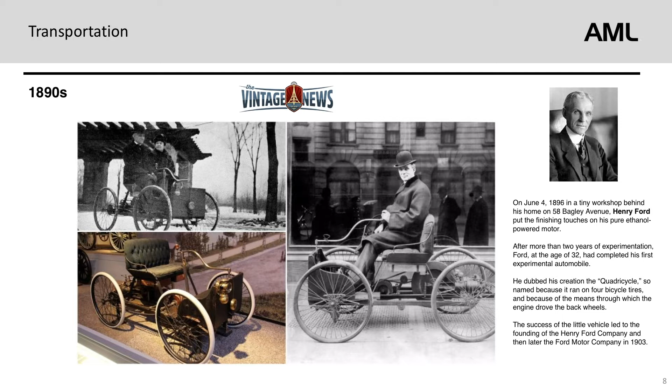At the end of this presentation, we'll see what the future of rail looks like. Then in the 1890s, because of Henry Ford working on his quadricycle in his back shed, he created the first automobile powered by pure ethanol. Shortly after, in 1903, he formed the Ford Motor Company, which was not just the beginning of cars for transportation, but the beginning of factory automation.

So here we are today. These are the various forms of transportation, from cars to rail to buses, etc., and again, all of them powered by fossil fuels—all using gasoline and diesel.

I think it's really important that as we understand that, we also understand our fuel sources and what components relate to our actual energy. As we know, energy is what drives everything, including transportation. If we look at the left-hand chart, transportation represents 29% of the energy used in the US. On the other chart, of that energy used for transportation, petroleum or gasoline represents over 55% of the energy sources used.

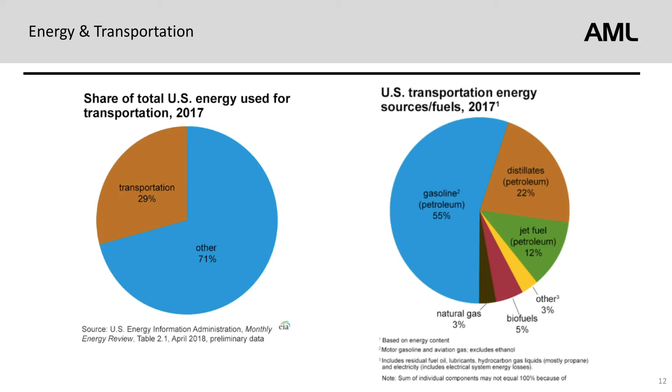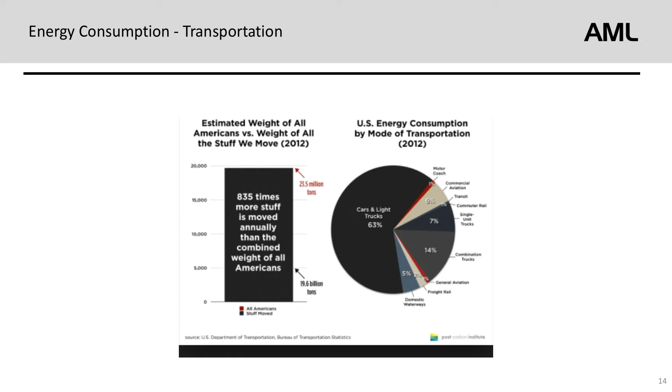So what are we transporting? We think about transporting ourselves to work, to school. Actually, 835 times more stuff is moved annually than the combined weight of all Americans, so most of what we're moving is cargo. And the vehicles we're using—63% of all modes of transportation are cars and trucks.

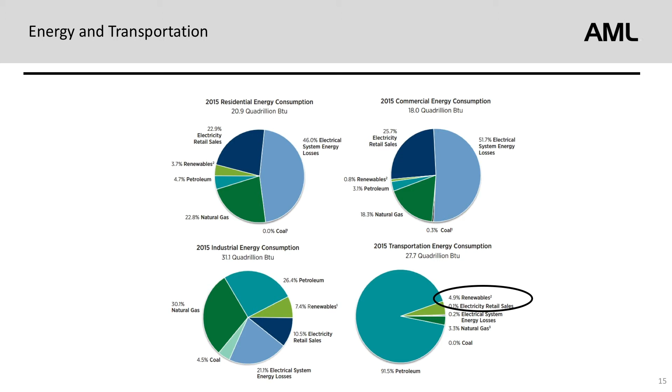If we look at energy and transportation in respect to consumption again—residential, industrial, commercial—transportation itself, in terms of its energy input, 92% of the energy used for transportation today is petroleum, and only 5% is renewable energy.

So again, here we are today. We have this issue of pollution, this issue of traffic, all kinds of challenges with transportation. So where do we go from here? What is the solution? Well, the solution is simple: eliminate gasoline and diesel. Do you believe that?

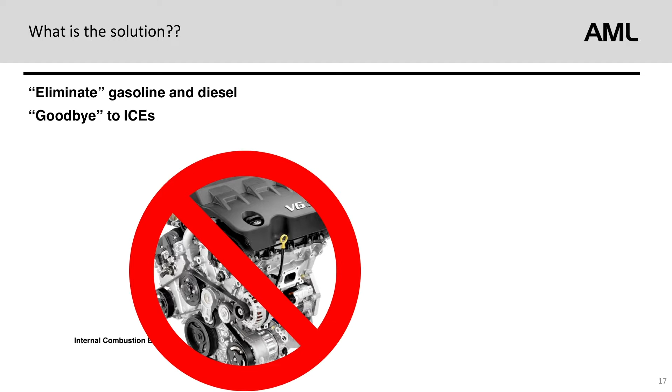We'd say goodbye to internal combustion engines and hello to electric motors. Do you believe that's going to happen? Well, you may not have a choice.

This is a really interesting slide that looks at various countries and associated cities in terms of where they're going with fossil fuels. What's most interesting to me is if you look at countries such as France, which has a mandate by 2040 to eliminate all gasoline and diesel, a city within France, Paris, has a mandate for 2025. So you're going to see a combination of both countries and cities within countries establishing mandates where you will not be able to purchase any type of fossil fuels for transportation.

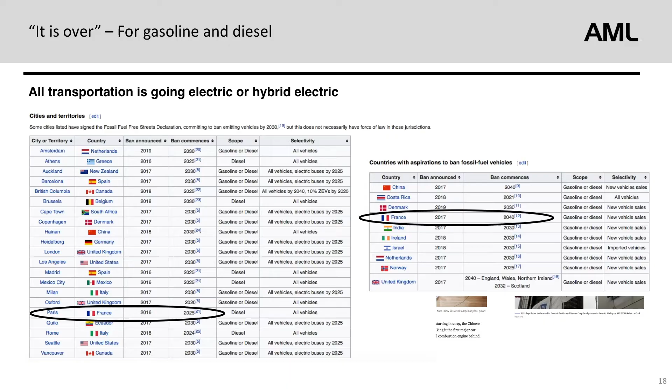So it's the end of a legacy. The great Henry Ford, with his first engine running on pure ethanol—and for some of us, this is my last combustion engine. My next vehicle will be driven by something other than fossil fuels.

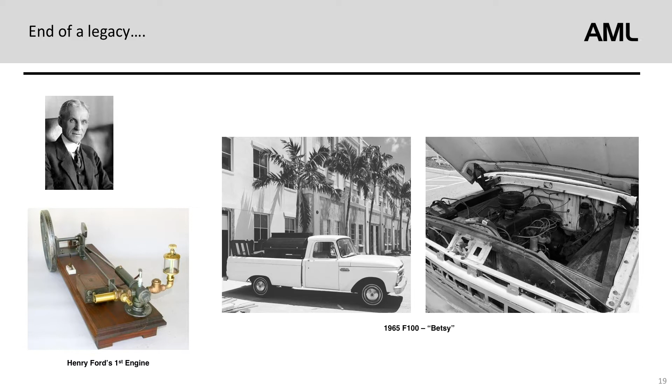So, virtually all transportation is going electric or hybrid electric, and based on that, all the major automotive manufacturers are ceasing the development of internal combustion engines. They're going electric - Volvo, GM, Mercedes.

But hey, electric cars have actually been around for a long time. Back in 1832 was the first electric carriage. And if you look at 1900 and the makeup of automobiles, of the 4,000 cars produced in the United States, 28% were electric, and a third of all cars found on the roads in New York City, Boston, and Chicago were electric autos.

Now let's take a break and let's talk about AML, and let's try to understand the relevance of AML, the Advanced Magnet Lab, in transportation.

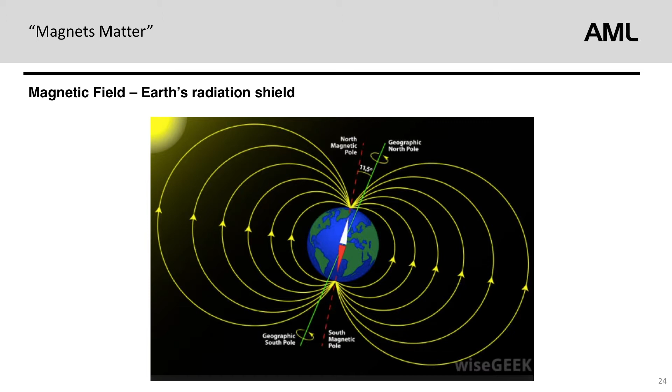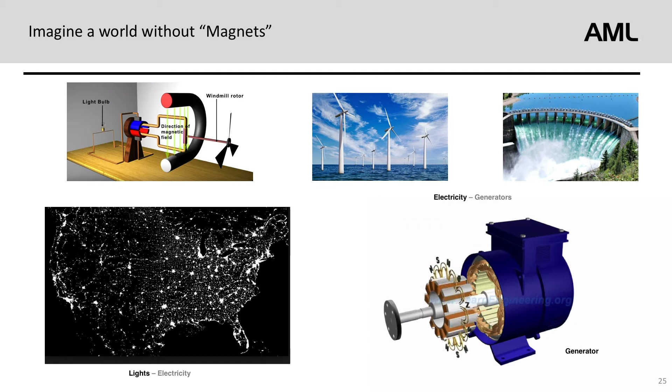So magnets enable generators, generators enable electricity. So when you look at a generator, I want you to think of a magnet. But a generator is also a motor. And motors give us water, which gives us manufacturing, which gives us farming. Magnets give us all types of modern day conveniences such as appliances. We have cars, we have robots, all driven by magnets, including our smartphones and our laptops.

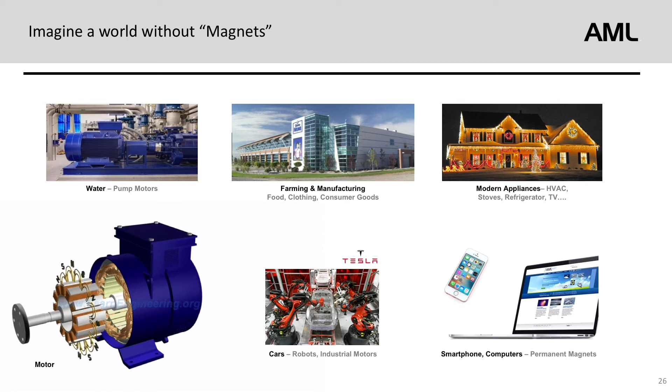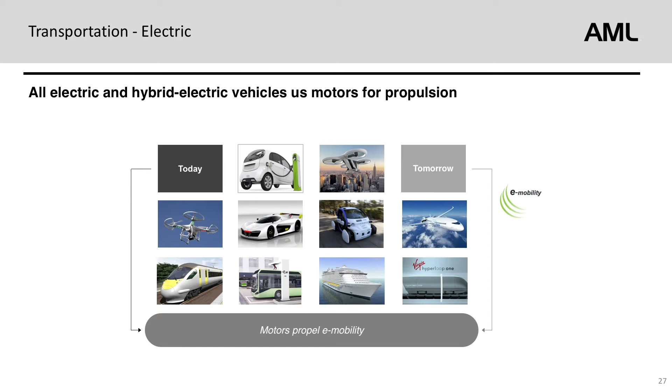And for all of these hybrid and electric vehicles, they all today are, and in the future the new vehicles are, driven by motors. And as you saw in the previous slides, if you look at motors, which propel e-mobility, motors are made up of magnets. So magnets are the beating heart of motors and e-mobility.

So if we look at electric propulsion, there's really just two components. And what do we hear about all the time when we talk about electric cars? We hear the biggest constraint is batteries - their power density, in other words, how much power per weight, and also their cost. So it's batteries. But wait a minute.

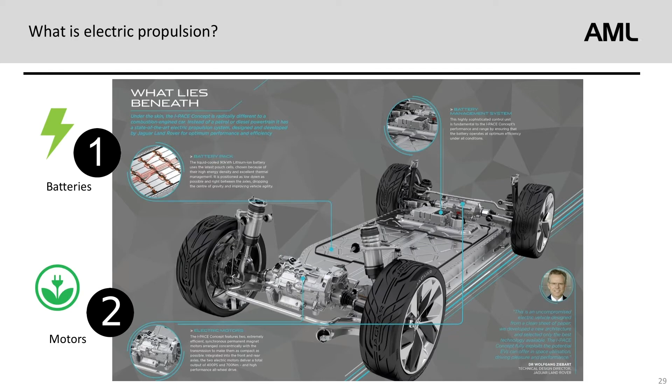Where does virtually all the energy go from those batteries? It goes to motors. So just like batteries, motors have a similar situation - we would desire to have the highest power density, so the highest power at the lowest weight, and the most efficient. And what did we say motors are? Magnets. So our company is involved in the development of applications all based around magnetics.

We work with startups, Fortune 100, Global 2000 companies. It's all based on a technology platform that we developed, which encompasses very advanced software, very advanced magnet technologies, and manufacturing technologies. And our business model is very similar to companies you might know, like Intel or Apple - we may not be the final product, we may not be the motor company, but we want to have the magnets inside. Very much like Apple designs your phone, sells you your phone, but relies on somebody else for the high volume manufacturing. That's the same with AML's business model.

Now, as you will see on the next slide, AML has very, very diverse experience across all sectors. But because of what's going on in transportation, and way beyond cars which we'll get to in a minute, AML is laser focused on e-mobility and bringing to market very, very advanced magnets, which at the very top level significantly improve the performance and cost of motors.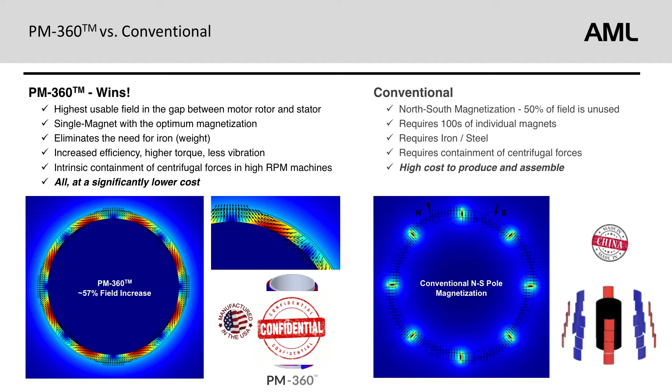So what does that really mean to a motor? Let's take a look at a few examples. If you look at a very small motor, a drone motor, something that is only about 22 millimeters in diameter, if we simply replace what you've come to know as this conventional north-south segmented magnets, as you see on the left-hand side, with one of our PM360 rings, and without making any other changes to the motor design, we get an improvement of approximately 10%.

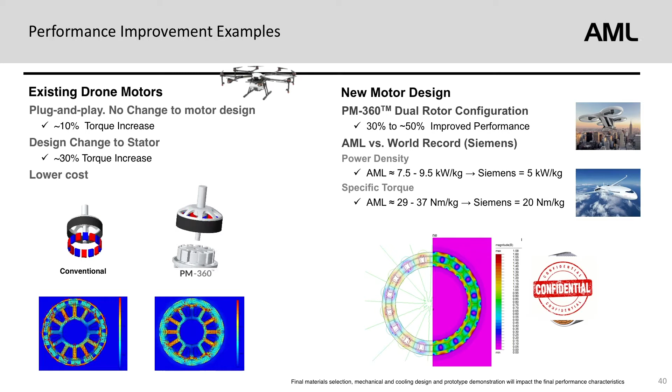If we do make some changes to the other end, that stator end we talked about, the copper end, we can have increase in performance of upwards of 30%. If we have the opportunity to apply two of our PM360s, something we'll call a dual rotor, in new machines, then we have the ability to increase the performance somewhere between 30 and 50%, depending on the application.

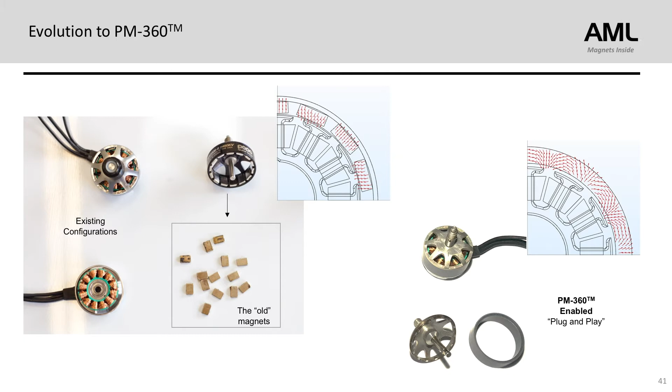Here's an example of the plug-and-play replacement, removing the old magnets and replacing them with a PM360 in a format of a ring. For drones, what does that mean? It means you can either fly further, fly longer, or lift more. This is just an example of case studies by some of the leading drone companies in the world, where they've given us their dream specifications, their dream desires, which could be less mass, could be more efficiency, could be more torque. Depending what they are, we analyze it through our software, understanding how our PM360 product performs, and these are an example of some of the results.

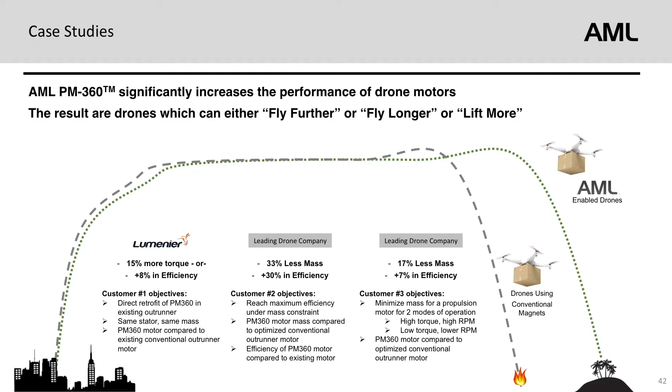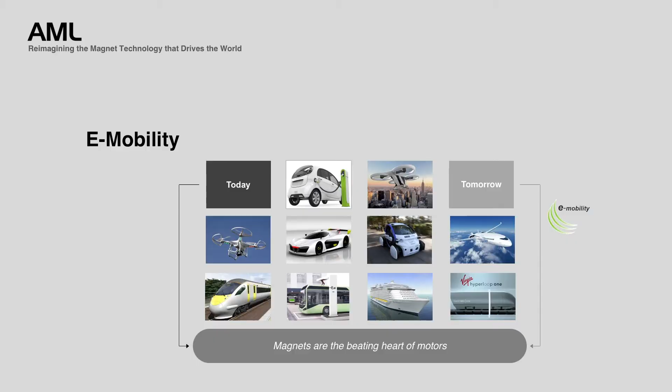So let's talk about e-mobility and beyond just electric vehicles. We have trains today, and we mentioned all kinds of different cars, and the reason for cars are some of these elements. When you talk about any type of electrical energy, you're always converting, everything gets converted to heat, so the more you can turn that into work, the more efficient it is. When you look at energy as a total component, electric cars are 95% operating efficiency of electric motor. That's really good. Fuel waste of 70 to 80% of energy is heat and wearing out parts. So this is just a comparison between hydrogen combustion engines and electric.

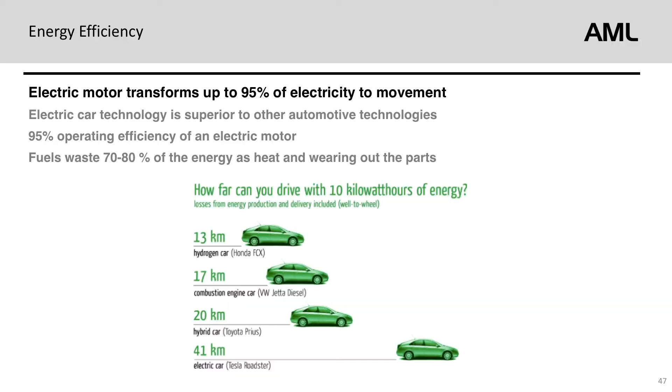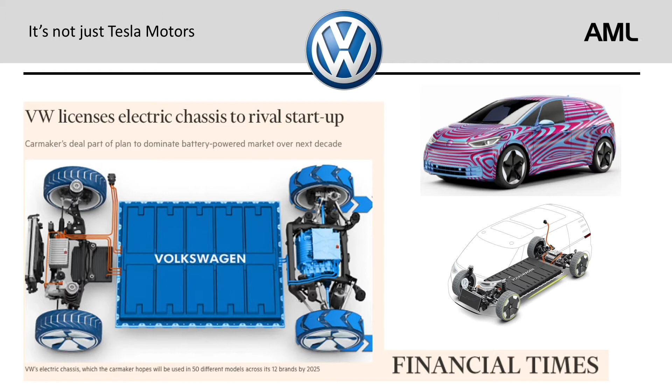What's unique about transportation today when you go electric is the business model change. If we remember Henry Ford, most of the focus was on the engine. Once you remove that engine and replace it with electric motors, now you're just focused on the battery and your simple drivetrain. So companies like Volkswagen are actually going to make available and license the actual chassis to other people, so you can buy the chassis with the battery and the motors and make your own, the rest of the car as you see it.

And of course, all kinds of nice features with all the new cars coming along. You will not be deprived of anything when you go from gasoline to electric. Again, it's not just Tesla.

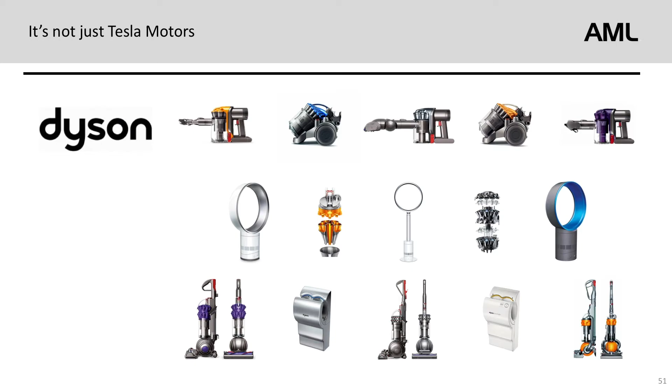Who knows Dyson? They make vacuum cleaners, hand dryers, hair dryers. Matter of fact, Dyson produces over 65 million motors a year, over 5,000 engineers, and guess what 500 of them are busy doing right now? Guess what product they're going to introduce around 2023? Their own electric vehicle. So even Dyson is going to be in the business.

Of course, there's many, many rumors about Apple. They've been working on this for some time, Project Titan.

And then it's not just big companies. Rivian Motors introduced a four-wheel drive truck, 0 to 60 in 3 seconds, 400-mile range, along with a full-size SUV with the same characteristics. This company was started by R.J. Scaringe, who today is 36 years old. Once he introduced this at this auto show, he immediately had Amazon come in to lead a $700 million round of investment.

Everybody's in the business, whether it's the high-end sports cars or the lower-end small cars, they're all headed to electric. And China is certainly way ahead of everybody.

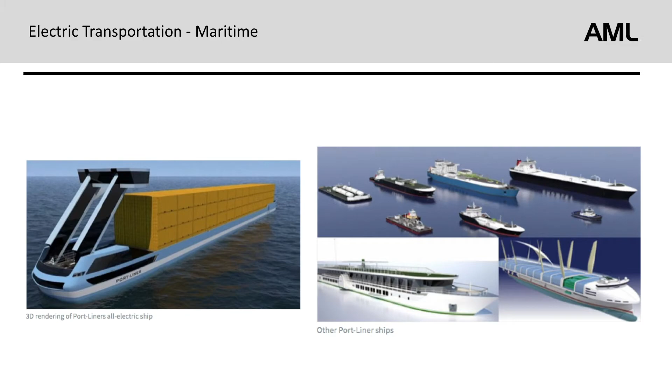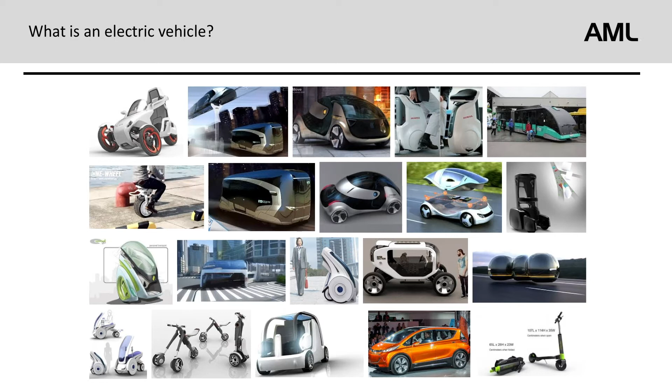And of course, it's not just cars, it's also trucks, soon to be maritime, beyond just diesel power generation to electric, but getting into more fully electric, hydrogen, all types of other energy sources. So who knows what type of electric vehicles you're going to have? Of course, e-bikes are becoming very popular, scooters, etc. But when you go electric, you have all kinds of interesting opportunities for vehicles.

So let's talk about aerospace, the future of aerospace. And when I talk about the future, it is really now. Here's where you're going to see the real radical changes. Going from an internal combustion engine in a car to electric, yeah, it's more efficient, less noise, but the car is principally the same. A lot is changing in aerospace.

So let's start with something you're familiar with, the smallest of the aerospace vehicles, if you will, something called UAVs or drones, an industry that's growing exponentially for delivery, inspection, emergency service, agriculture, construction. The applications for drones are endless. I hear people sit down and start to write on a piece of paper how many applications they could come up with for drones. Once they get over 50 or 60, they realize that it's almost unlimited.

You may have recently seen in the news that UPS has made their first blood delivery, and the University of Maryland made their first kidney delivery, so organ delivery. And Google now is getting approval to begin their drone delivery service. Of course, the military is probably one of the biggest purchasers of drones out of all markets. Those range from very large drones, which you see in the next slide, to these very, very small drones, which give every soldier a whole new set of eyes and tools to do their job.

But of course, with most technology, there's a downside. The Army is actually worried about the military being bombarded by drones. I've talked to other people that have unique applications in terms of these swarming drones, with the idea to have drones that can carry 50 gallons of water. So when you go to a forest fire, you attack it with hundreds of drones versus a helicopter with a 500-gallon supply of water.

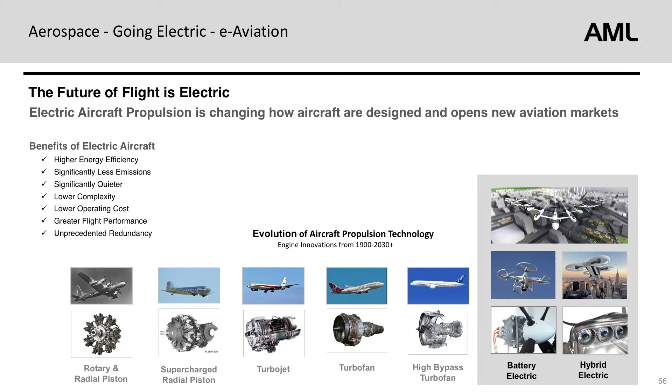Than it is to use a large gas-burning turbine engine, which is used today. And of course, you're reducing the carbon dioxide by over 70%, nitric oxides by over 17%. You're lowering your operating costs. It's safer, you have redundancy, you have less noise. And you have the ability to design some really cool optimized aircraft because you're not limited to 2 wings, a tail, and 2 big jet engines.

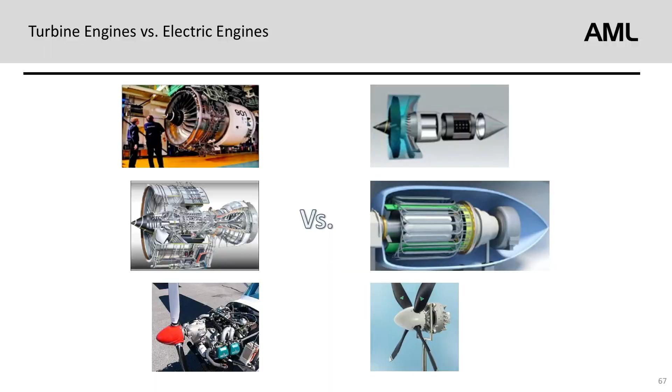So this is a nice graphic just to show you the simplicity of electric propulsion versus turbine engines, which are running at the right on the borderline in terms of temperature and RPM, again replacing them with a simple motor.

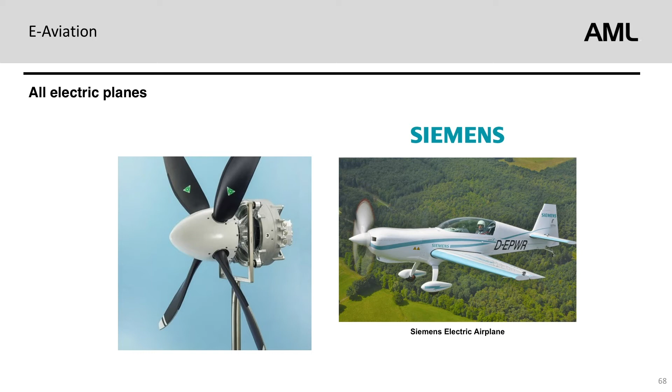And so where we're at today is we have electric planes beginning to be sold. Siemens is leading this in terms of the motor propulsion. Bye Aerospace is one of the leading companies that's taking in orders and beginning to deliver these small aircraft that are all electric, battery driven of course.

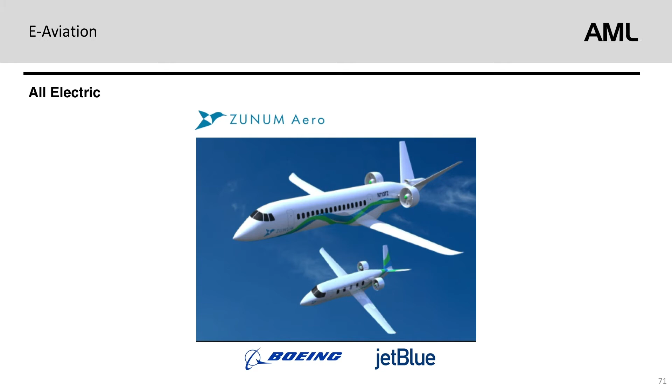Other developments going on at Bye Aerospace include even solar powered aircraft. But these small electric aircraft, there's many companies that are headed down that path. There's some new startups that give the promise of a business class style aircraft, so multiple passengers. They claim they'll still be able to do it all battery. We will see how many people and how far they'll go.

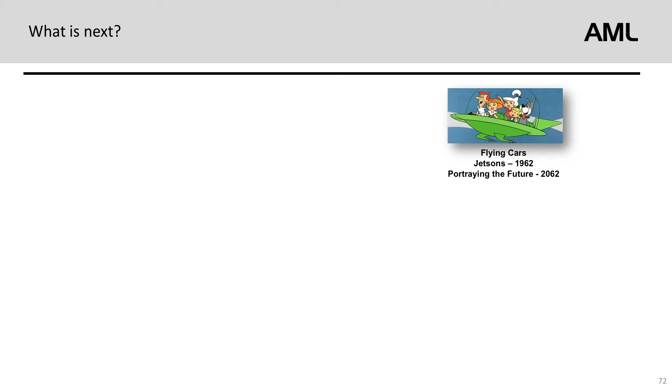But what's next? We talked about the futures now. Many of you remember the show The Jetsons, which was in 1962 and portrayed lifestyle in 2062. We're way ahead of George Jetson's predictions. So we don't call them flying cars, we call them something else. And we've actually been working on it for quite some time.

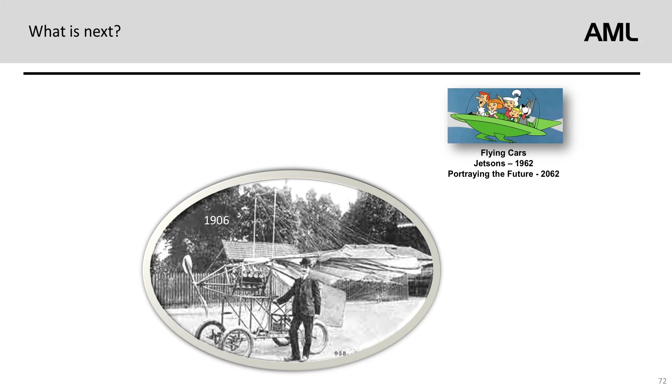Here's in 1906, here's in 1949. And actually here locally on the Space Coast of Florida, at the Florida Institute of Technology, Professor Palmer Stiles was publishing and working on his flying car back in the early 90s.

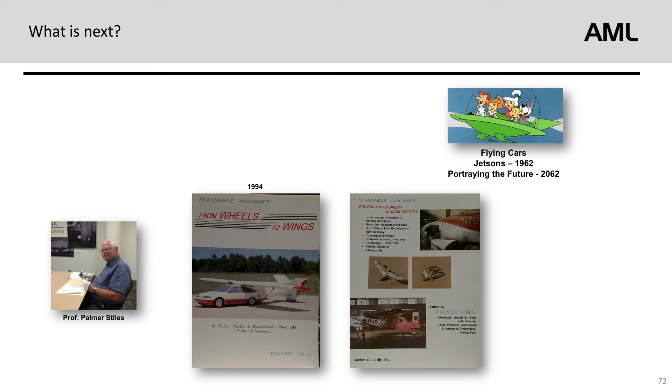What we call these e-VTOLs. This whole concept of a flying car, if you will, or what we call an electrical vertical takeoff and landing vehicle, has been established in terms of an industry by Uber. Uber is investing over $2 billion into this industry. So you no longer just have ride share, you'll have air share.

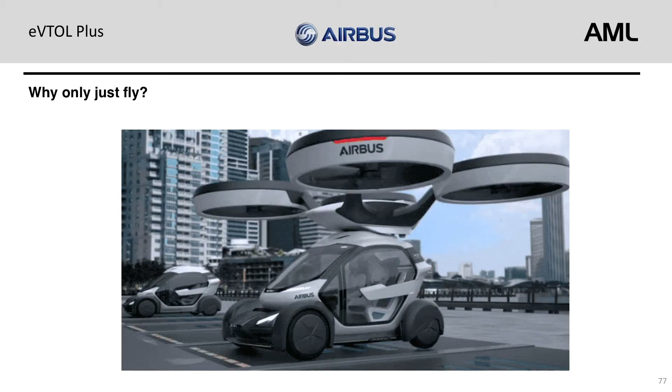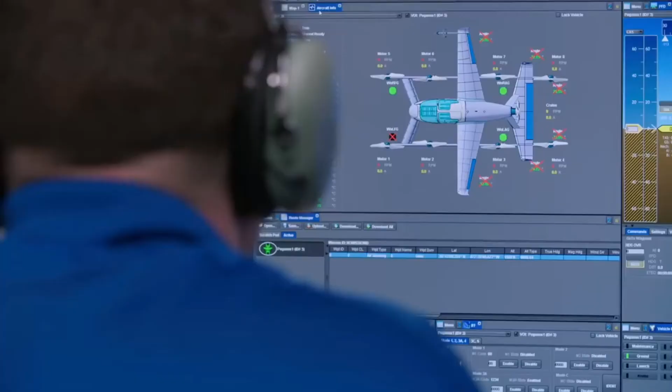Well, let's see what Boeing's up to. Again, very similar to Airbus. These first demonstration vehicles are somewhat of a modified aircraft. This one is not near as advanced as what you saw with Airbus, but again, it's proving out some of the hovering capabilities, propulsion capabilities. This vehicle here is being developed for Boeing by Aurora Flight Sciences.

Everybody's in the business. Some of you might know Bell Helicopter. Well, Bell Helicopter doesn't exist anymore. Their new name is Bell. They've eliminated, they've rebranded, no longer Bell Helicopter, and they've changed their logo to a dragonfly, showing the agility of their new vehicles. Very similar to the Airbus vehicle, although this one actually has, as you can see there, it's a quad, but it actually rotates or gimbals these propulsion motors.

One thing I want you to pay close attention to is that every one of these vehicles has a unique design and a unique propulsion requirement, and many of them even have different size motors. That makes AML very happy because the technology we showed you, the permanent magnets, the PM360, is completely agnostic to the final solution. We can configure it to meet the specification of every different propulsion motor for eVTOL, other aircraft, and EV vehicles.

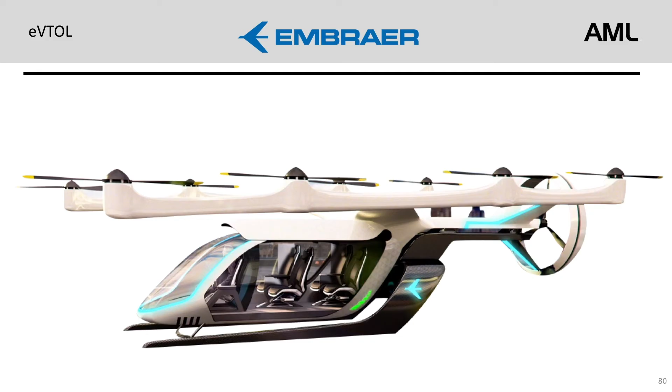Embraer, this is an older version of their eVTOL. They have a newer version now that's not public. As you can see, you've got the propellers there which provide the hovering or lift, and then the propeller in the back, the propulsion system, is what you call the pusher.

And it's not just for people. Another application is organ delivery. Martine Rothblatt, who has a company called United Therapeutics in the business of lungs and lung disease, refurbishing and delivering lungs, has a vision to solve the organ delivery problem. You saw the University of Maryland delivering a kidney, but delivering some organs is more complex and requires a very large payload to keep them alive. So she has a vision to use eVTOLs instead of going from hospital to courier to airport, flying to another airport, to a courier, to a hospital. Her vision is to use eVTOLs and go hop, hop, hop to get organs much quicker to the patient. She is teamed with Beta Technologies and Kyle Clark for developing these eVTOLs.

Kyle has recently been in Wired magazine, and he's called the Edward Scissorhands of Flying Cars. So let's see what our friend Kyle is up to.

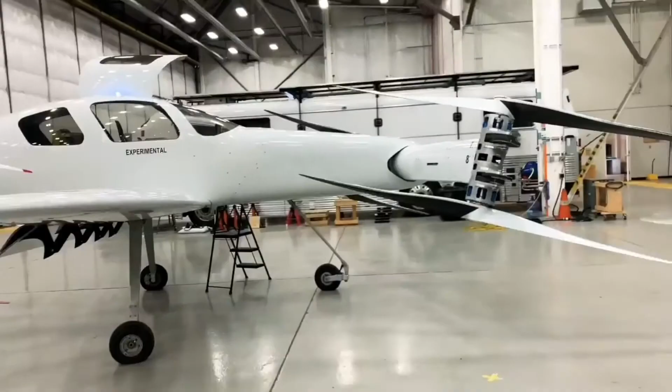This is a 4,000-pound eVTOL aircraft with 8 motors and rotors: 4 rotors on top coupled to one battery, and 4 rotors on the bottom coupled to another battery. They're counter-rotating at each corner, and the aircraft takes off vertically with the nacelles pointed 90 degrees toward the sky. As it rises, the nacelles tilt forward and it accelerates forward. There's shared lift between the rotors and the wing, and as those approach 0 degrees, it turns into a regular airplane, and the power comes way down because the lift is produced by the wing and the thrust is produced exclusively for forward motion by the rotors.

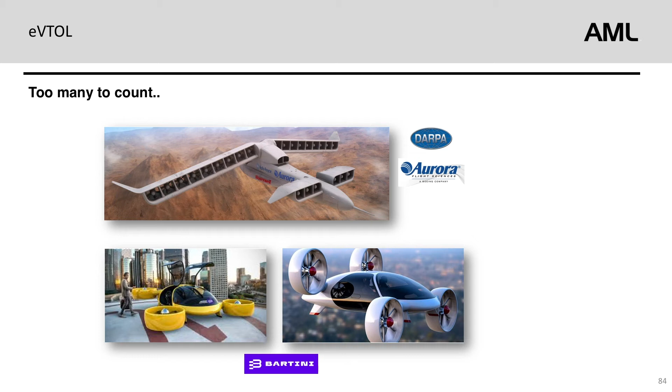There are so many eVTOL companies, quite honestly too many to count. This is the current list on the eVTOL news directory. As we mentioned before, at AML we are agnostic to who wins here—we just want to have our PM360s inside.

So let's talk about the larger aircraft. We can no longer just rely on batteries, as we talked about before, so these vehicles are designed with small turbine generators. You have a small turbine engine powered by jet fuel, hydrogen, or biofuel that generates electricity out to the propulsion fans.

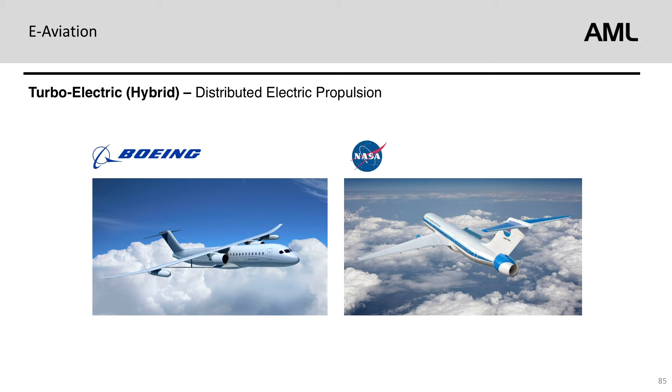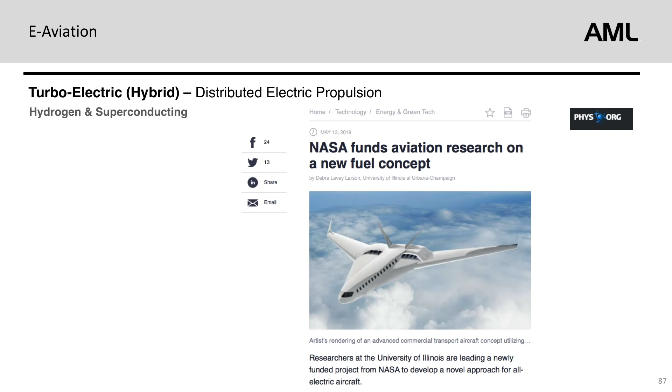I mentioned earlier the motivation behind developing technologies for aerospace, working on the N+3 program. NASA's dream is still to have large superconducting powered aircraft, and this is a good example showing turbine generators on the wingtips—you can't see it, but on this fixed wing vehicle there are something like 20 propulsion fans providing the propulsion. Recently they announced additional funding going to the University of Illinois, still focused on superconducting propulsion, but also on the use of hydrogen as a fuel concept.

So let's switch gears now. Let's get back to land. Let's talk about really futuristic transportation—how do we get, for example, from LA to San Francisco in 30 minutes?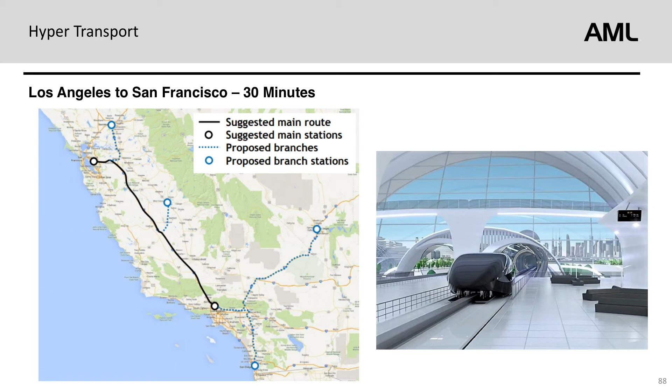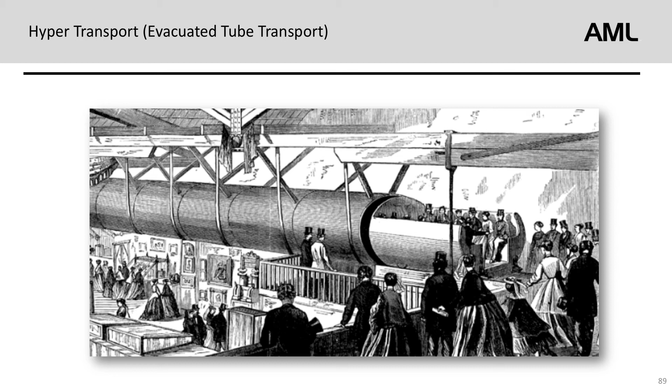Well, we do that by getting in a vehicle that's magnetically levitated, magnetically propelled, and we stick it in a tube. It's a concept we know Elon Musk announced several years ago, but it wasn't his idea. NASA's looked at it for a long time. Matter of fact, since the 1800s, we've looked at putting people into a vacuum tube. So today we have several groups pursuing it, and this is their vision: being in a vehicle, in a tube, traveling at 400 to possibly up to 4,000 miles per hour.

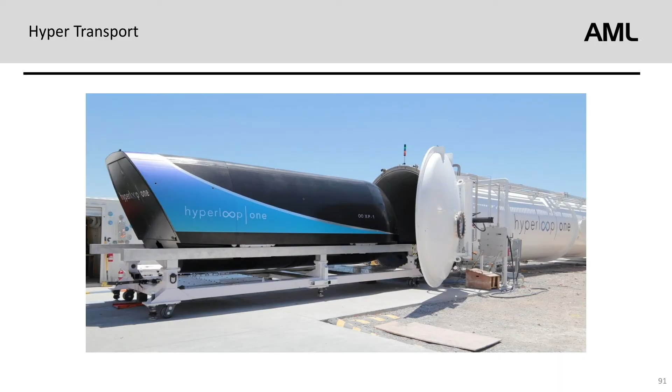This reminds us again that transportation is becoming a lifestyle. So it's about the lifestyle, not the technology. As I mentioned, the capabilities range from 400 to 4,000 miles per hour.

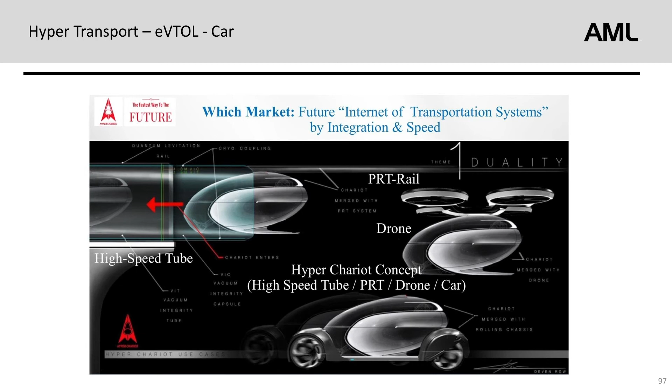And then there are some more futuristic concepts people are working on, which still use that evacuated tube, but now make it a PRT, what we call a personal rapid transit or transport vehicle, encompassing that as a car and also a drone. So that would be the ultimate PRT vehicle.

We have these nice, quiet, efficient cars, trucks, and planes, but somehow we have to produce electricity. So while we looked at energy production and consumption at the beginning of the presentation, we need to think about how we get there in terms of an electrically driven world on the power generation side.

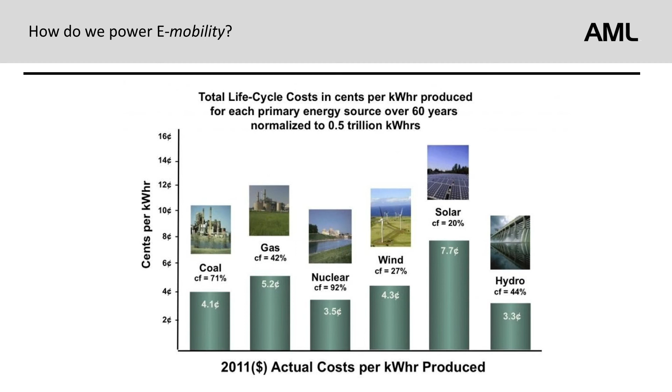So this is a busy chart, but it shows where we need to go on the power generation side, particularly on the renewable energy side. You can see here, and on this next chart, that the cost of electricity, the levelized cost of energy, the cents per kilowatt hour, continues to go down in solar, continues to go down in wind, and many parts of the world have a lot of hydro. So we're really well on our way to having this electrically driven world.

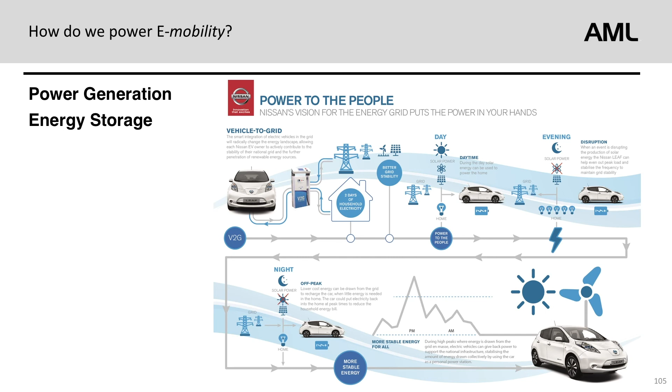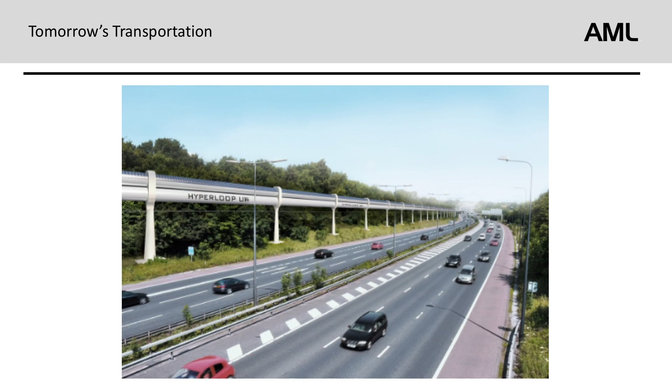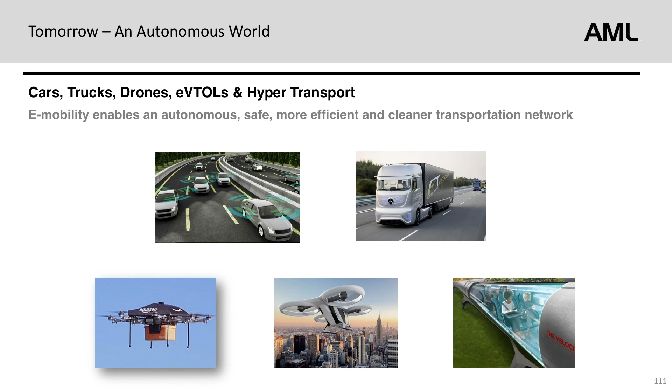So the ideal situation would be, yes, we need to address the infrastructure, but do we want to fix old bridges and old railroad tracks, or invest in new transportation that's much more efficient? Putting our rails above the highways gets rid of the issue of running trains through towns with crossovers. So this is the future: highways, electric cars, hyperloops, eVTOLs, all types of transportation vehicles, all electric.

And then we have the autonomy. All of these vehicles we looked at today are going to be, at some point, partially or fully autonomous. It's a different world, and the world is changing. For young people today, they may never have a driver's license. Why would you need one? In 2019, there are already cities testing autonomous Lyft vehicles, so you can imagine in the next 5 to 10 years where autonomous and partially autonomous vehicles are going to be.

One more transportation system we'd like to look at is something we call a Skyway system. This happens to be Skytran. Let's take a look at what they're up to. It's a technology that was developed inside NASA, and it's now come out and is working on being commercialized.

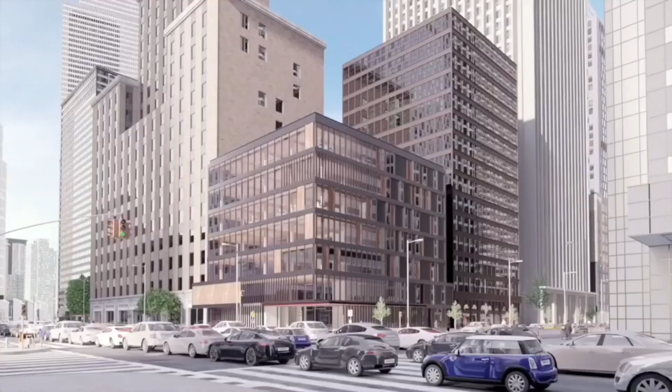Traffic is just getting worse, and driverless cars won't save us, because the problem is not the driver, it's the car. It's been a century, and it is time to move on. Skytran is the first public transit system that's as personal as a car. It will unclog our cities and transform our lives.

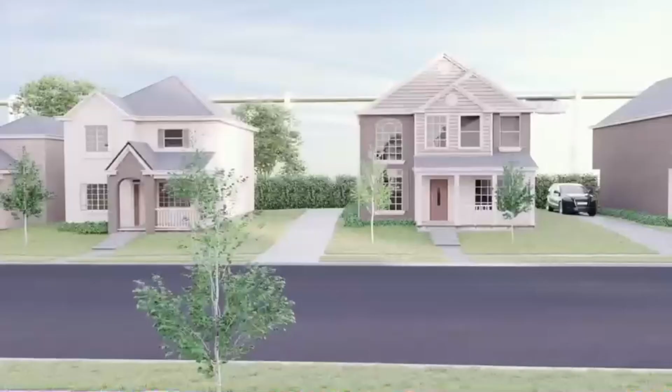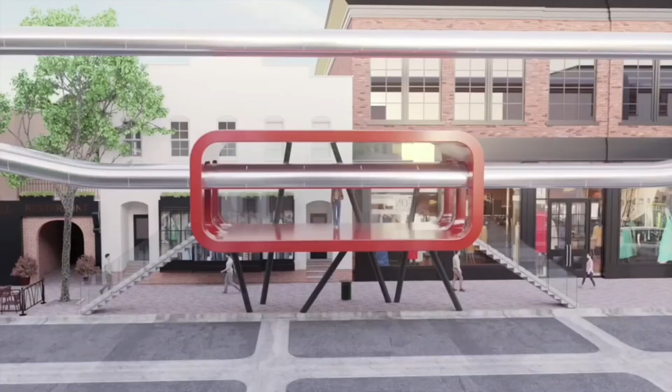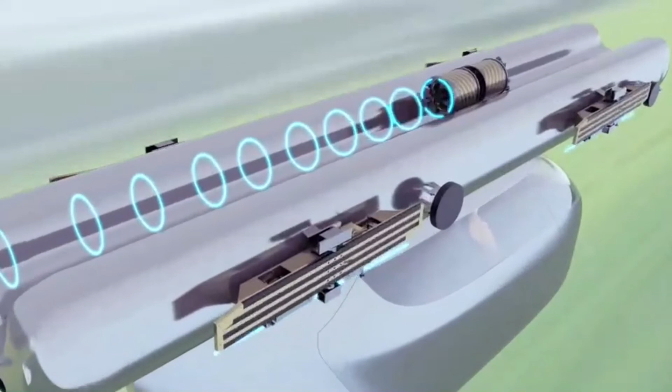With Skytran, there's no schedule. Its predictive artificial intelligence knows when you need your ride. Stations are so narrow they can fit over sidewalks, so they are always just a short walk away. Skytran's revolutionary magnetic levitation technology enables you to fly on a cushion of air. Traveling in a Skypod is so quiet and smooth that you can comfortably work or just relax. Skypods don't need to pick up or drop off other passengers, so there are absolutely no stops on the way to your destination.

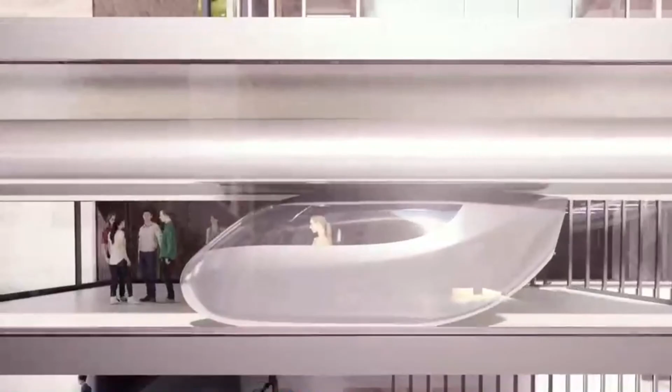In the city, Skypods can fly over busy streets at 50 miles an hour and speed up to 200 miles an hour between cities. With some stations built directly into office buildings, a 2-hour commute can be reduced to 20 minutes. Skytran's low cost and simple construction allows for many more lines than conventional public transport systems, which in turn allows for greater capacity. Per mile, Skytran is one-tenth the cost of light rail and one-hundredth the cost of a subway. With its speed and high capacity, Skytran can bring an end to traffic.

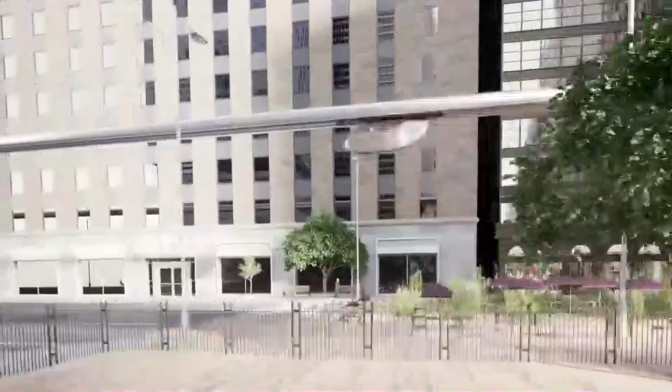A dream come true. The next step will be something we've never even dreamed of: transforming streets into parks, cafes, and markets. Without cars, we can breathe, create, and wander.

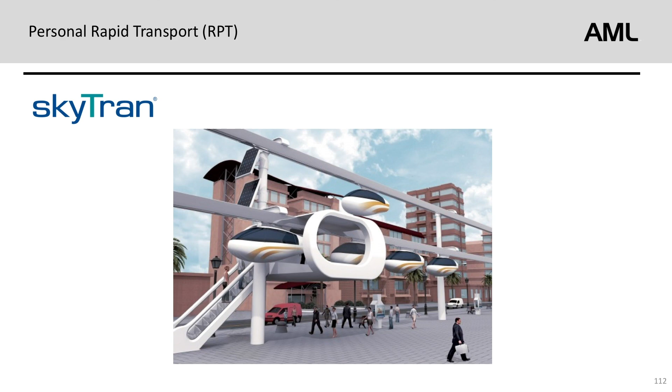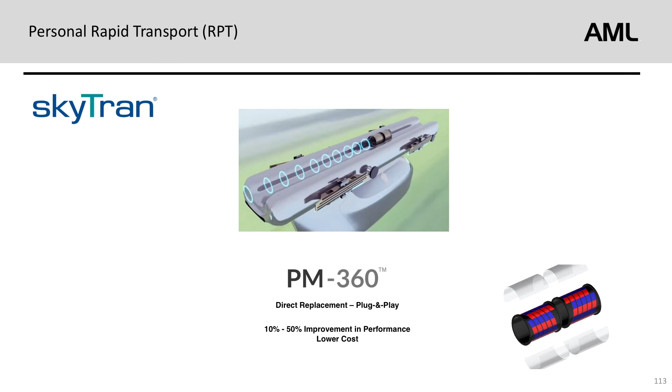So no end to transportation opportunities. The other thing we like about this, as you saw in the video, is that it's magnetically driven with these magnetic helical motors, and it's magnetically levitated. This is an example of where we can replace over 300 magnets with one single magnet with a PM360 and improve the performance.

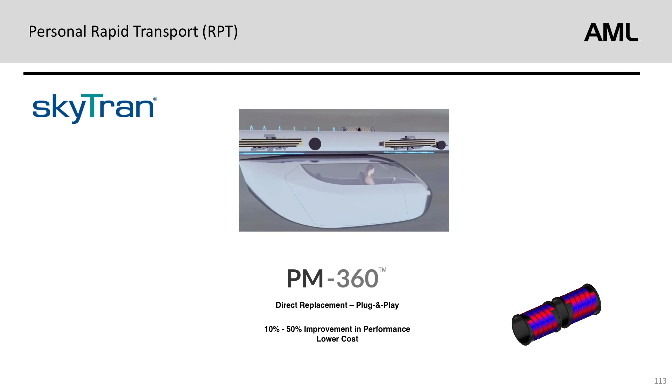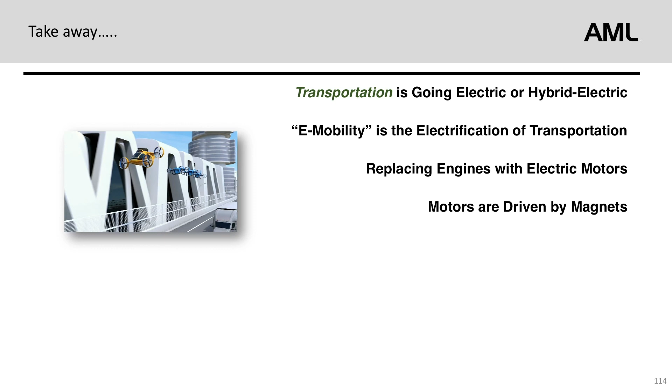So what are the takeaways? Transportation is going electric or hybrid electric. E-mobility is the electrification of transportation, replacing engines with motors. Motors are driven by magnets, and therefore transportation is driven by magnets. At AML, we are reimagining the magnet technology that drives the world. Thank you, and come see us.